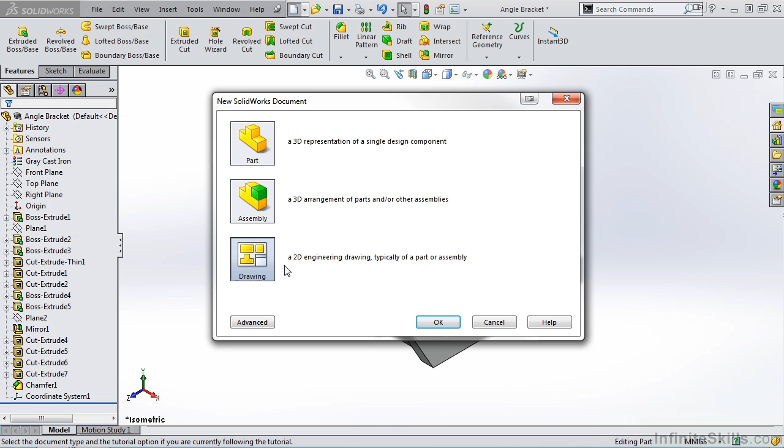So how do we get into the drawing environment? There are a few different options. The first is a screen we were just at: you select New, the dialog box for New SOLIDWORKS document opens, and you select Drawing. Another option is to select the arrow next to the New icon and choose Make Drawing from Part or Assembly. Another option is to select the File drop-down menu and then Make Drawing from Part.

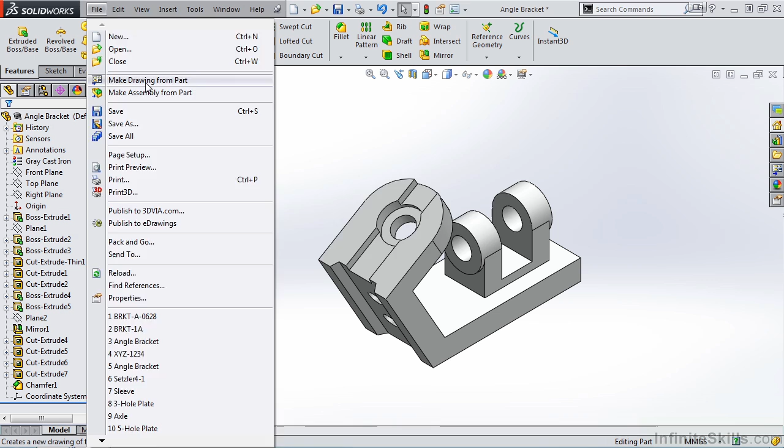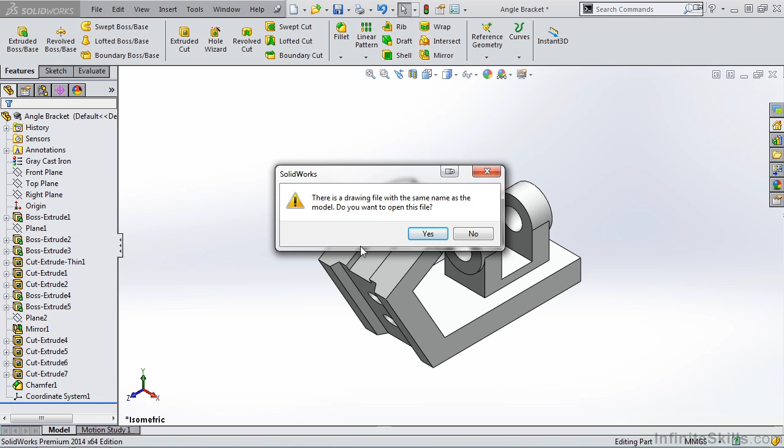I'm going to select this one here, and I receive a SOLIDWORKS message: there is a drawing file with the same name as the model, do you want to open this file? It's basically asking if I want to open the drawing already created for this angle bracket. I don't—I want to show you what it looks like to open a brand new drawing. So I'll select No, and we'll come back to this completed drawing later in the lesson.

When you go to create a new drawing, this is the dialog box you will see—a sheet format size dialog box. Here you either select one of the standard sheet formats or browse for your own. Either way, after completing this, you will see a sheet format on your screen. I'm going to select A3 ANSI Landscape, then select OK, and click one time on the screen to close down the view palette. Now we see the A3 sheet format.

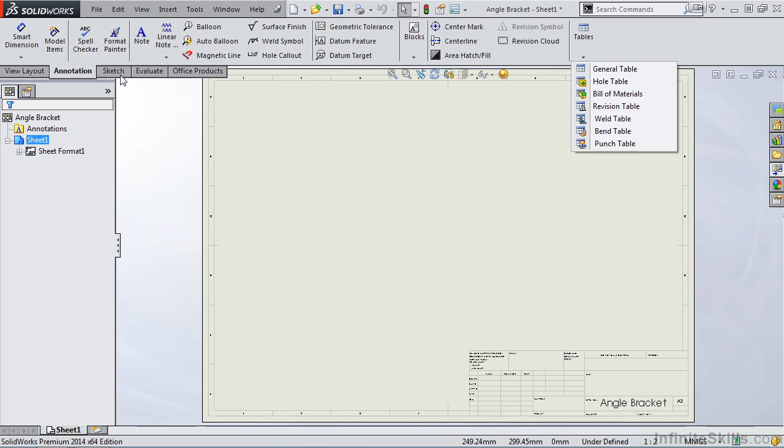Now let's take a look at the drawing environment. In the upper left-hand corner, you'll see a couple new tabs. View Layout is where we insert views into the drawing sheet and create other types of views—notice auxiliary views, section views, broken out views, and alternate position views. We also have another new tab called Annotation, which opens a window with smart dimensions, model items. You can auto balloon, add weld symbols, GD&T symbols, and center lines. You can also add different types of tables to your drawing sheet. So those are two new tabs. We also recognize the Sketch tab and the Evaluate tab.

On the left-hand side of your screen, we have a Feature Manager tree. Now let's open up that finished drawing I talked about earlier. Here's the finished drawing for the angle bracket. Take a look at the Feature Manager tree—you see all of the views. Just like the part and assembly environment, we can make changes to those views from the Feature Manager tree, or from the graphics area.

Before we leave this lesson, we need to talk about two different modes you can be in within the drawing environment: Edit Sheet mode or Edit Sheet Format mode. We are currently in Edit Sheet mode—I know because I see views on the sheet, and the status bar says Editing Sheet. This is the mode where you add views, dimensions, and notes, and it's the mode we are in at this time.

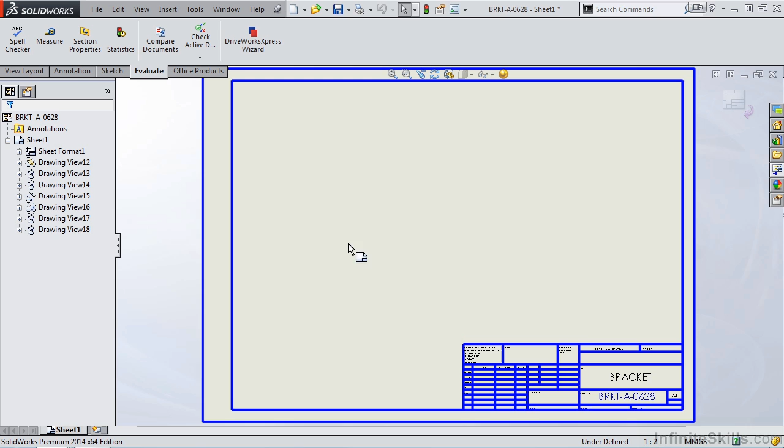Now let's go into Edit Sheet Format mode. I'll go to the Feature Manager tree, right mouse click on Sheet 1, and select Edit Sheet Format. The views disappear, and in this mode I now have access to the title block, where I can make changes and additions. When ready to exit, we go back to the Feature Manager tree, right mouse click, and select Edit Sheet. The views return, and we're back in the mode of adding views, dimensions, and notes.

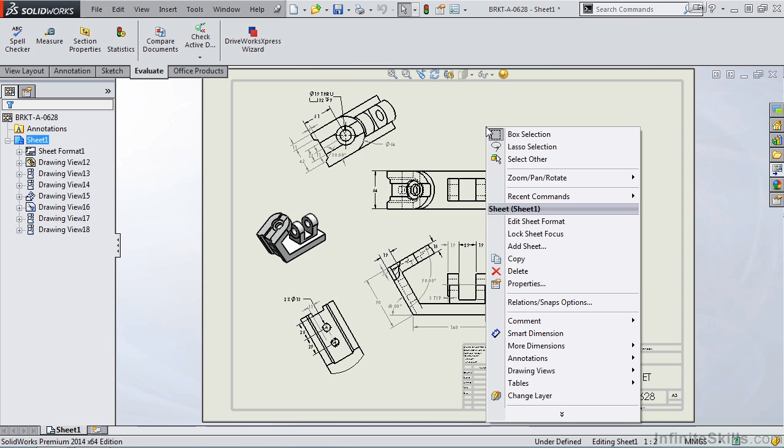Another way to switch between the two modes is to right mouse click in the sheet area—notice we have Edit Sheet Format. When I'm done, I right mouse click and select Edit Sheet.

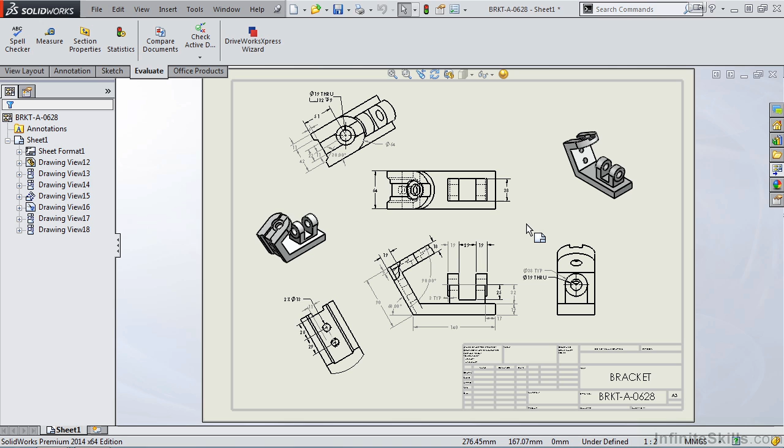This ends our lesson on the drawing environment. Over the next several lessons, you'll find that creating views, creating the different types of views, adding dimensions, and adding notes is very user-friendly. I think you will find these next couple chapters to be very enjoyable.